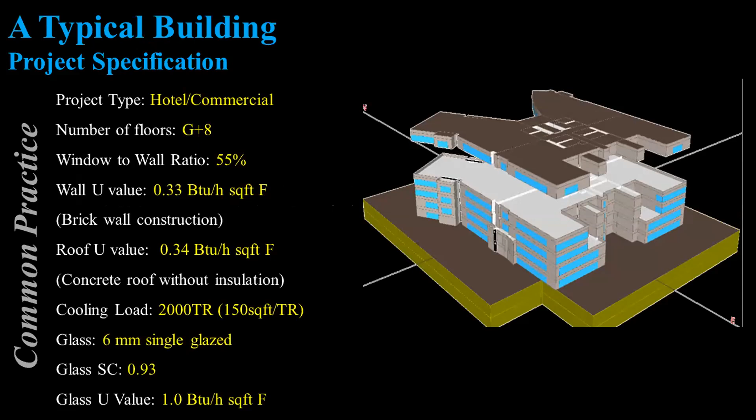When we analyzed this building, we realized that nearly 50% of the heat gain was being contributed by the envelope itself. It had a good window wall ratio. It had a good amount of glazing on the facade.

25% of the loads came from the internal, and 25 came from the ventilation, the fresh air load. Out of the envelope load which was there, 90% of it came from the four sides because a high amount of glazing was being used. 10% came from the roof.

And when we looked further in terms of the four walls or the four sides or the facade, we found that 90% of the heat gain was from the glazing and 10% was happening from the walls itself. So the glazing did play an important role in the overall context of the facade of the building.

Those were the days when we used to play with the building using the simulation tools. The simulation tools had just come out, and I also decided to play with the same building and see how relevant the whole thing is even today. I took that building and simulated it in all the four major climatic zones of India, which are composite, hot and dry, warm and humid, and moderate. And interestingly, the internal load remained constant because there is no change in the internal load.

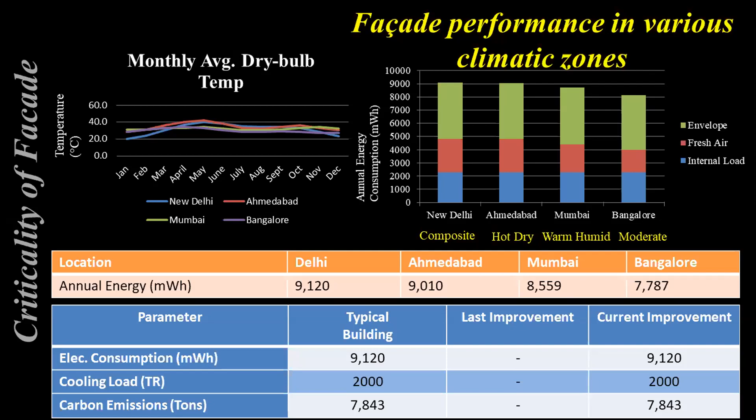What did vary was the fresh air load. That means the amount of fresh air which was being injected. Obviously, in case of composite climate, it has a higher impact as compared to the other climates. And the envelope load also varied in this context, as long as the envelope was not optimized. I'll speak more on this further.

Then I decided to further play with the whole thing and said, let's optimize and see how far we can drive this building. This was an imaginary building, so I could rotate it around. I could do anything with that. So we started rotating the building every 45 degrees. And you can see here the energy consumption dropped, and at a particular orientation, the north-south orientation, which is what Mr. Suresh Saab also spoke about, the building had the least energy consumption. So I picked it up.

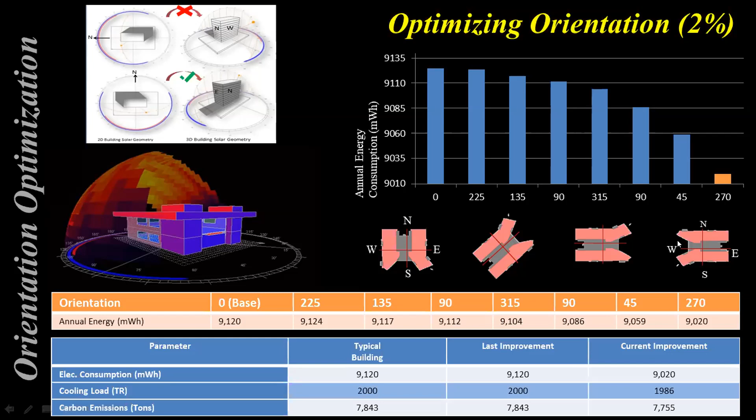To the same building, we started looking at the window wall ratio. The building that I had started with had a window wall ratio of 55%, which means 55% of the facade was glazing. It wasn't 100%, it wasn't that bad. It was a good building to have 55% area as the glazing. Started playing with it, bringing it down to 20%. And at 20%, it did yield a good result in terms of giving us the lowest energy consumption out of the optimized lot.

One would argue that at 20%, your daylighting might get affected, but there are many such good examples you would find around. In my own buildings that we have designed, we have found that 20 to 25% of the glazing area, if it is done rightly, is able to 100% daylight the building. And this finding was there in this building also, where 22% glazing area gave us a 100% daylit building. And these are some of the examples of green buildings which have come up in India, where they use the window wall ratio in a very beautiful manner.

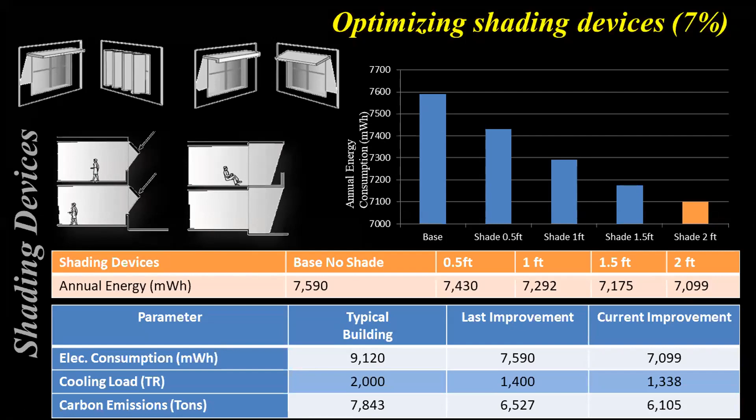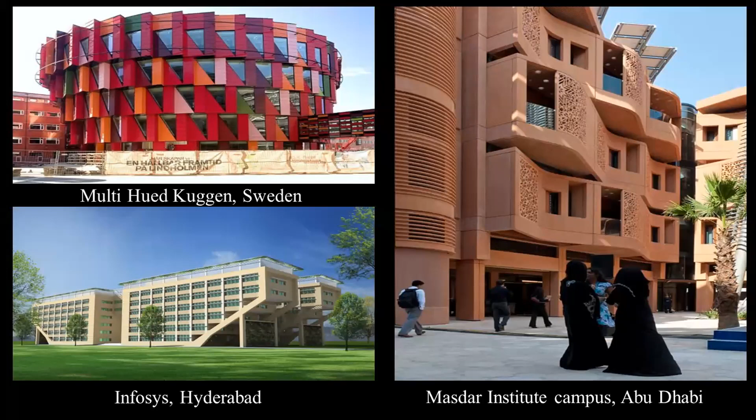Then we started looking at the shading devices. Since this was an imaginary building, I could play with it. We started doing the shading devices, which is the chhajjas, and extended the chhajjas from 0 to half a foot, 1 foot, 1.5 feet, 2 feet. And obviously the bigger chhajja gave us a good saving, as the direct sun could not come inside, and we could have better shading on the glass itself. We took that further and looked at some examples worldwide where shadings have been deployed beautifully and aesthetically appealingly by architects.

We started looking at the glass selection. Obviously, there are good glazings available today. And if you look at the number of companies, the variety of glazings, there are excellent selections available out there. In fact, the other day I came across a beautiful glass from a company which was practically clear. It was an architect's delight. And simultaneously it was also giving good protection, a good U value, and the shading coefficient was also decent enough. So these are the kind of glazings which are available. We selected a good glazing and applied it here.

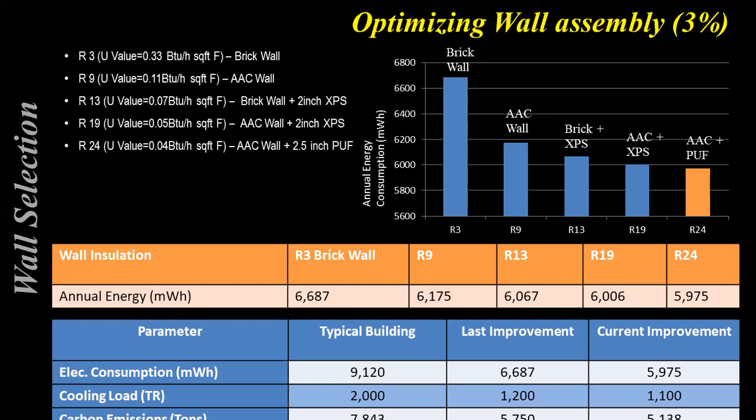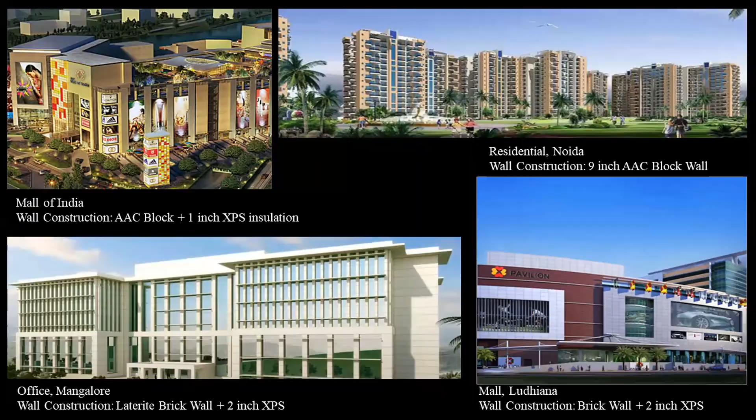Then finally, we looked at the wall assembly. In those days, we had still not started thinking about insulated walls. But today, if you look at the ECBC, the requirement of insulation in the walls is very much out there. We used a wall with insulation, and you'd be surprised, even in commercial applications the same has been done. If you look at one of the largest malls in Delhi NCR, Mall of India, it has actually got extruded polystyrene insulation on the outside. So there are developers and projects where these insulation materials have been used, despite talks about them being expensive or cost being an issue.

Just these 5 steps of optimizing the building envelope brought the air conditioning load down from 2,000 tons to half, about 1,000 tons. The energy consumption came down by nearly 35%, with an equivalent saving in carbon emissions also. That was very interesting at that time, because this was my start of understanding facades and interacting with facade designers and architects on designing high performance buildings.

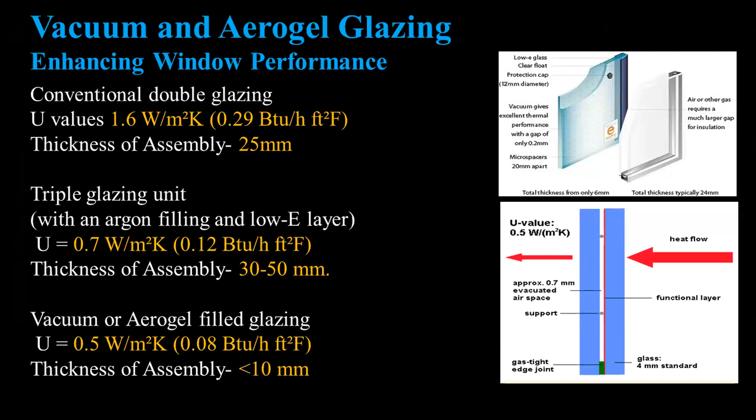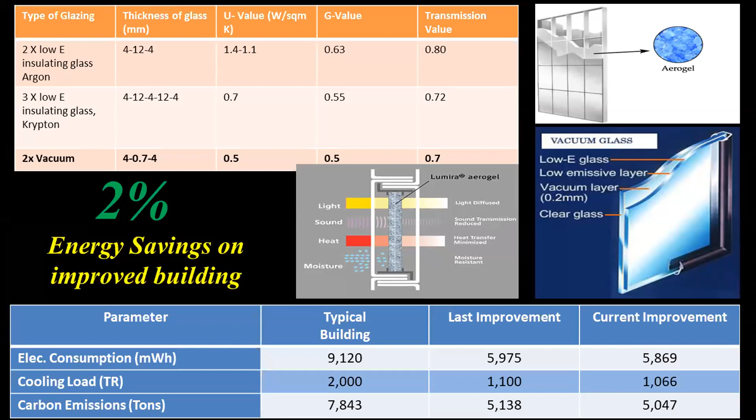We took this building again and looked at how we could further optimize it. I Googled at that point and came across the world's best glazing. When we applied this world's best glazing to this optimized building, which already had right window-wall ratios, right shading devices, right insulation, and right glass, we got only 2% more savings on energy. This proved that it's not important to put the most expensive glass, but important to put the right kind of glass in the right way.

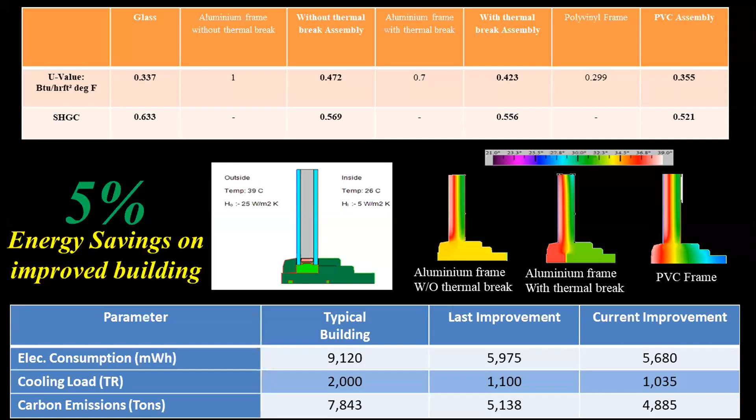We started looking at more ways to save energy. We looked at the thermal break in window frames, which ensures there is no climatic contact between outside and inside. Thermal breaks are excellent, but even till date we don't use them on most of our projects because of cost issues. Incidentally, the thermal break did yield nearly 5% savings in energy for this building, and it does make sense to look at the savings coming from the thermal break.

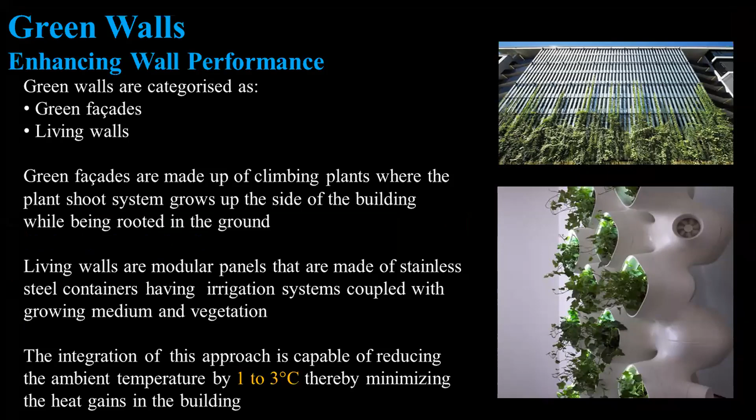We started looking at more innovative solutions. We said, why don't we look at putting a green wall? Because that green wall can actually shade the facade and help us. That incidentally gave us another 3% saving on the energy front. These are some examples worldwide where green walls have been very successfully used on building facades.

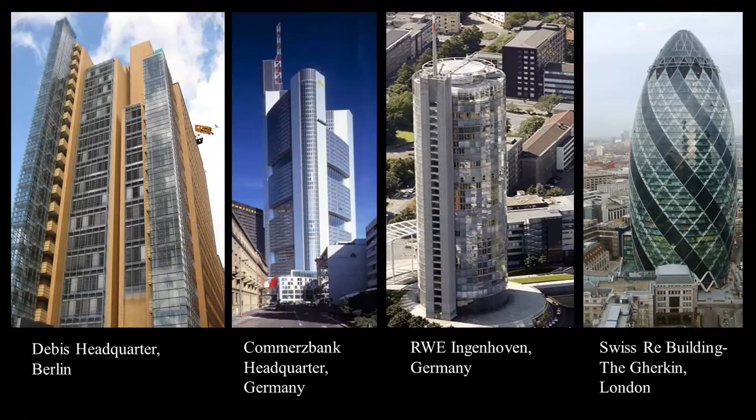We looked at double facades, where there are two layers of glazing with a gap in between, acting as an insulation layer. In colder climates it acts as a heat trap, and in warmer climates it is ventilated, reducing heat transmitted from the outer side to the inner side. So double facades, the ventilated facades, gave us a saving of 5%. These are some examples worldwide where double glazing and ventilated facades have been tried out. I haven't seen many examples of it in India, but it's something that exists.

The important thing was that for the most optimized building, after doing those basic 5 steps I spoke about initially, applying things like the world's best glazing, a ventilated facade, green walls, or thermal break could give us only limited savings, and the fundamentals of the design were the key.

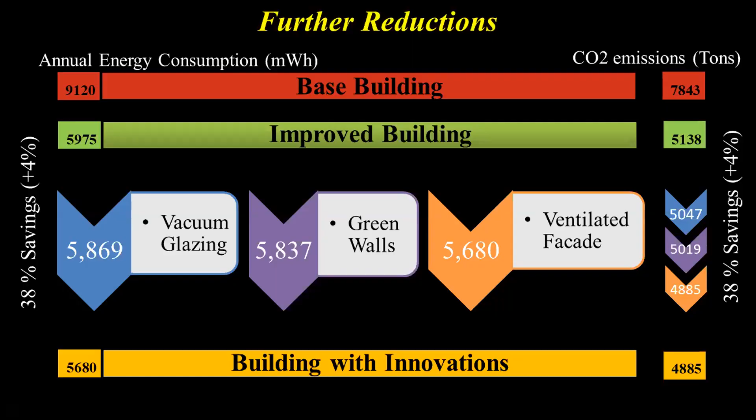Now this is what we worked on and talked about 10 years back. Since then, the world has moved a lot, and the country has moved a lot. Dr. Suresh Saab spoke about the National Building Code, Part 11, which is on sustainability, where we have covered the passive design aspect and facades in big detail. There's also the ECBC and the ECBC-R, where R is for residential buildings. Both of them again have a big focus on the building envelope and the role it plays in terms of energy. So far, all the discussions have been around energy itself, because that's been the driving issue till date.

We had a great green building movement. Suresh Saab mentioned about 7.5 billion square feet of green footprint that we have. And this green building movement, even though I've been part of it for 2 decades, I felt it missed the important connect, which is the common man.

Green buildings, till date, connect very well with the designers, the architects, the owner, maybe with the people associated in construction with it. But when it comes to the people inside, their appreciation of green stops because they are not directly gaining out of it, or they don't see any gain out of it.

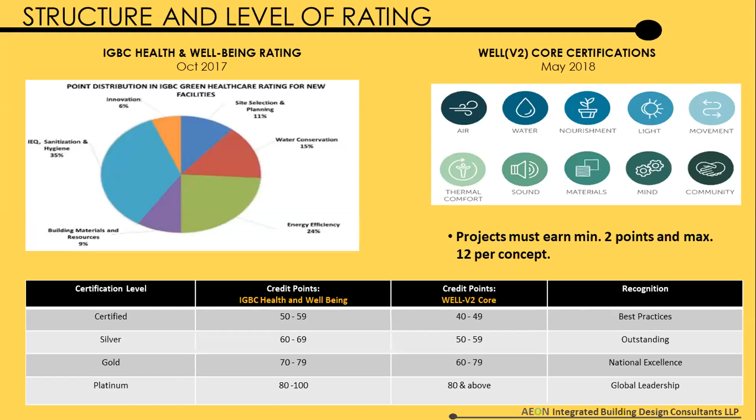That's why the newer rating system now out in the market, the WELL or the Health and Wellbeing Rating System, which IGBC came out with in 2017, and similarly the US Green Building Council promoting the WELL certification. If you look at both, their focus is all about people, and it directly impacts people who are working, living, or staying inside the building. Their certification levels are exactly similar to green buildings in terms of silver, certified, gold, and platinum.

But their focus is on the wellness of people. If you look at the IGBC rating system, issues like indoor air quality, comfort - which includes visual comfort (facade), thermal comfort (facade), daylight comfort (facade), acoustic comfort (facade), and indoor air quality to some extent dependent on facade. A large number of those credits are related to the facade of the building.

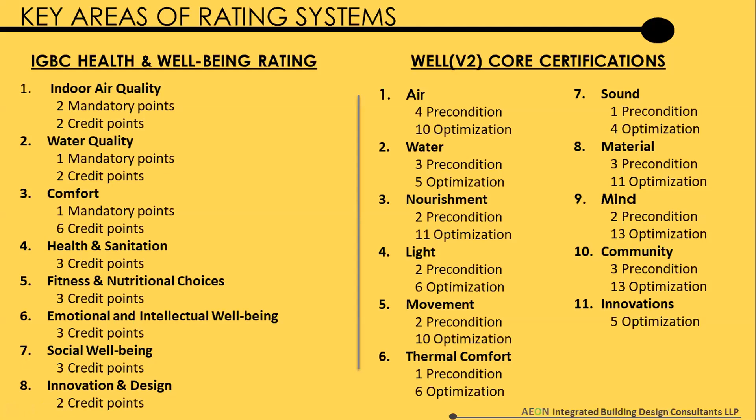If you go to the WELL certification, again air is facade, light is facade, thermal comfort is facade, sound is all facade. Some of it comes down to intellectual wellbeing, emotional wellbeing, all linked to the kind of environment we're providing to the people inside. So the shift is perceptible - shift is about the people, for the people, in what we like buildings to be.

I'm going to take you through some examples of buildings. Since I like to respect the time, even though Dominic has been kind enough to give me 45 minutes, since we started late, I'll try to go a little faster.

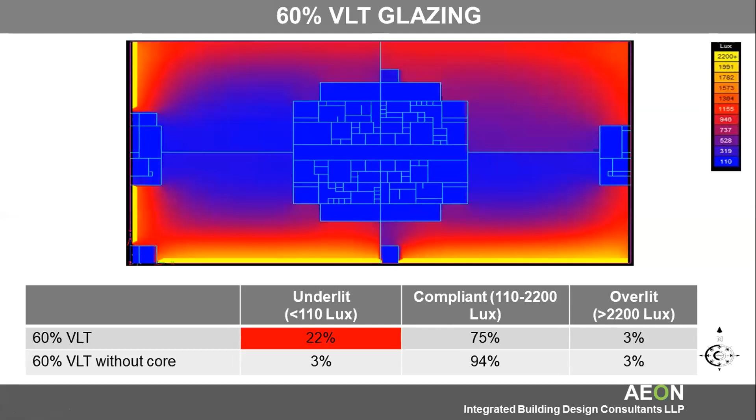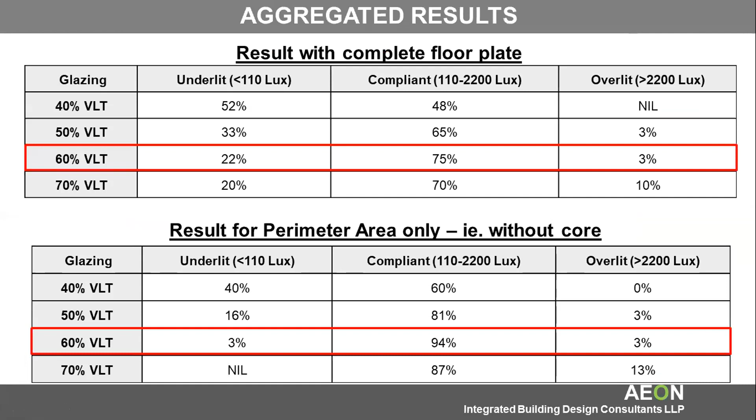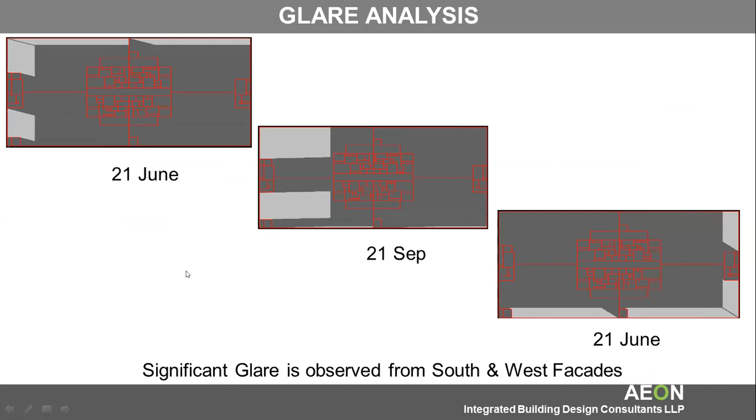But more important than daylighting is the glare it brings in. We could see that a 60% VLT glass could serve a good purpose for daylighting and for the wellness of the people. But look at the glare. If you see the videos running on the screen, you'll notice there is a good amount of gray patch indicating the extent to which light is penetrating inside on the floor.

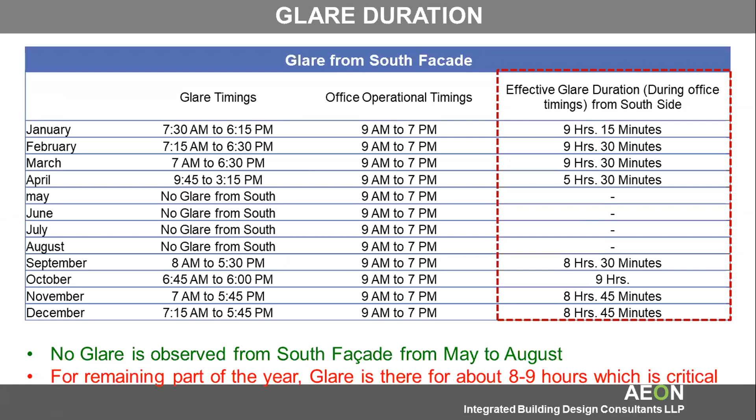On both the south and west side, there is deep penetration taking place. On the south side, practically the entire year, there are about 9 hours of the day where sunlight penetration onto the floor occurs. One could mitigate that using simple steps. Similarly, on the west side, penetration was nearly 5 hours every day throughout the year. Ultimately, this meant that along both the south and west side, one cannot even have seating there. If somebody is sitting there and we need to occupy the floor plate completely, those people will insist on the blinds being pulled down.

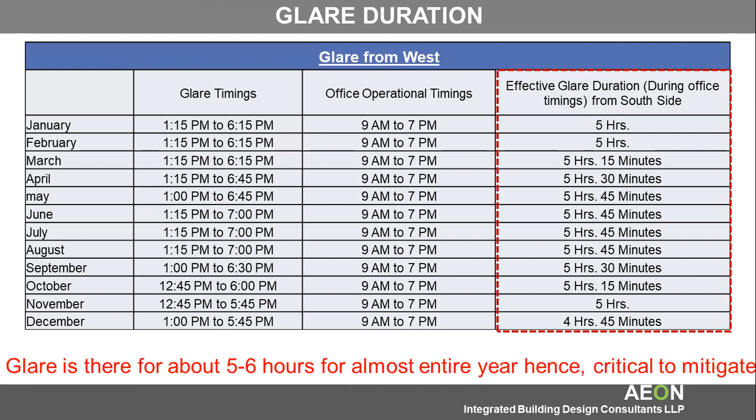The air conditioning engineer will never be able to satisfy them in terms of thermal comfort, and it's going to be total discomfort for those occupants. Once we did those corrections to the building, I'm not getting into how we correct a facade, because the intent of this presentation is how the health and well-being of the occupants is related to the facade, while looking simultaneously at the energy aspects.

When we corrected the facade design using shading devices and the right kind of glass, we could achieve 97% of the floor plate daylit with no glare. No glare, absolutely, you can see it on the floor plate.

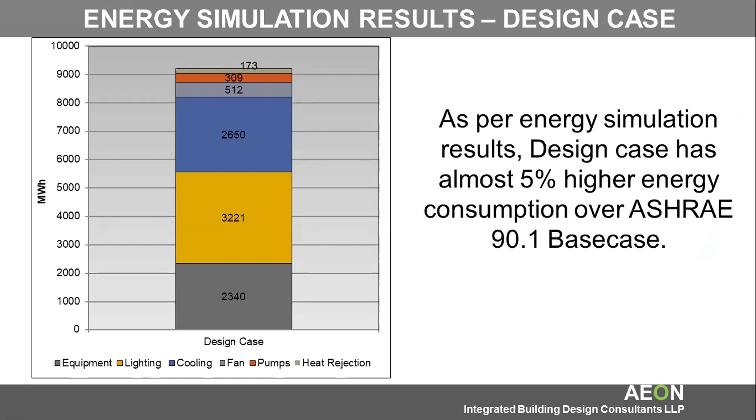On the energy side, for the same building, if we had stuck to the old building design, the earlier building would have consumed 5% more than the baseline of ASHRAE 90.1. Mind it, the green rating is given based on how efficient you are over the baseline, and in this case we were consuming more than the baseline. So it was in the reverse direction.

This building had an air conditioning load of nearly 1900 tons, consuming 5% more energy compared to what the ASHRAE base case was all about.

Look at what correcting the elements of the facade could do, making sure there's the right glass, the right insulation, the right shading, and the right window wall ratios. One could get the load down to 1100 tons just by the right kind of selection of the facade.

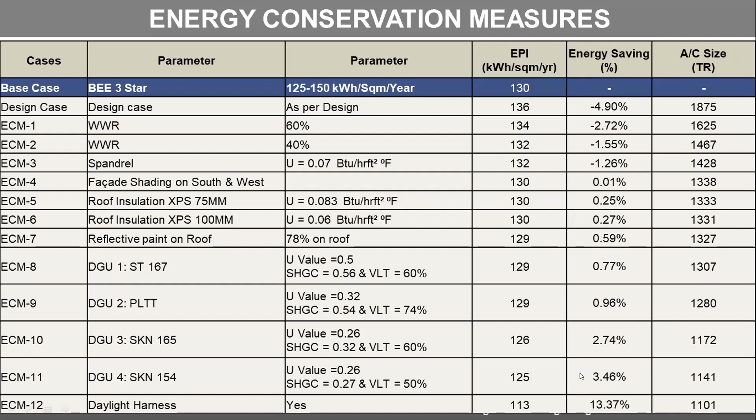800 tons of reduction, and look at the energy savings, nearly 18% energy is now being saved over the ASHRAE base case. Then we also looked at the electromechanical aspects, and we brought it down ultimately to 1000 tons, from 1900 tons down to 1000 tons, which was a big journey to travel in this case.

In another building, the brief from the tenant to the developer was that they wanted an envelope load of less than 1 watt per square foot, meaning the heat gain from the building envelope should not exceed 1 watt per square foot. To give context, in a conventional building it could be as high as 3 to 4 watts per square foot, so this comes down to 25% of what a conventional building might do.

Another brief said 80% of occupied areas should be daylit. Another line said zero glare in the indoor spaces. And another line said 100% of spaces should have outdoor views.

Now look at the brief which came from the tenant. It was a build-to-suit building for the developer, and the developer has to comply and demonstrate it. Now who's going to demonstrate that at the end of the day? It becomes the role of the architect, the HVAC engineer, and the energy engineer, all of them working together to achieve that.

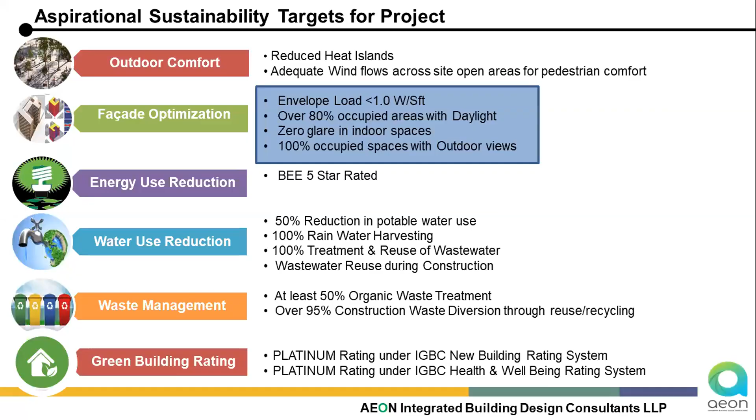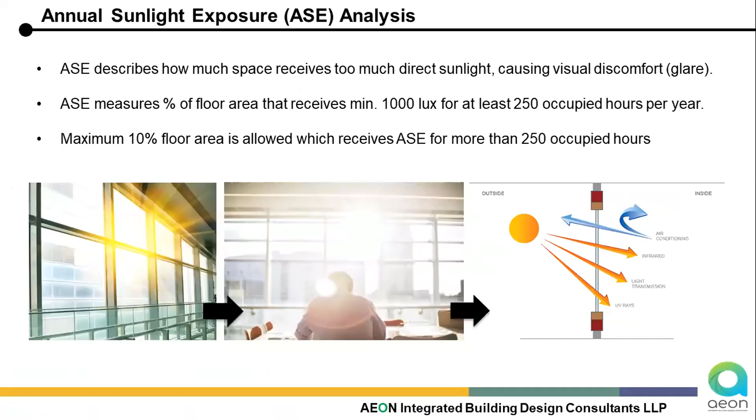Whereas in the first two buildings the glare was within control to some extent, the third building had all the west sun coming in with a very bright glare patch. Nobody could sit along the glass there.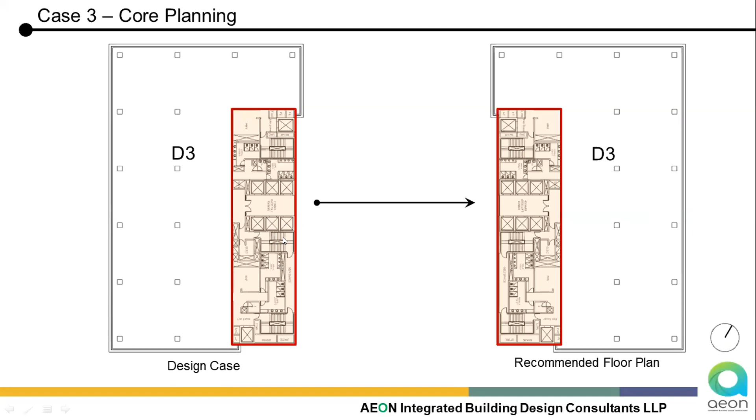The simple thing we could tell them was cheap and best: shift your core from the east side to the west side, block the west side using the core. That simple move could cut down the glare by more than 50%. It was a great suggestion.

Everybody from the engineering fraternity loved it, but from an architectural and aesthetic front it did not make sense, because this facade overlooked a beautiful green area, and the whole pleasure of looking out was being affected by it.

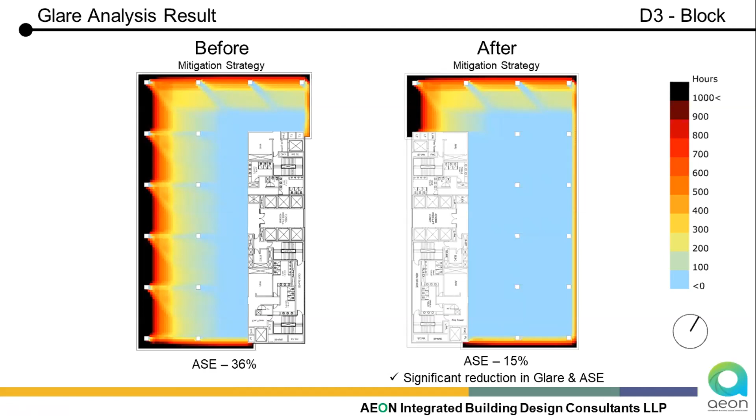So we came out with a different strategy. In fact, today there are more opportunities available to architects and facade designers to look at technology options. There's something called parametric design, where shading devices were put outside using this parametric system. There are about 2,000 iterations being done here on the screen.

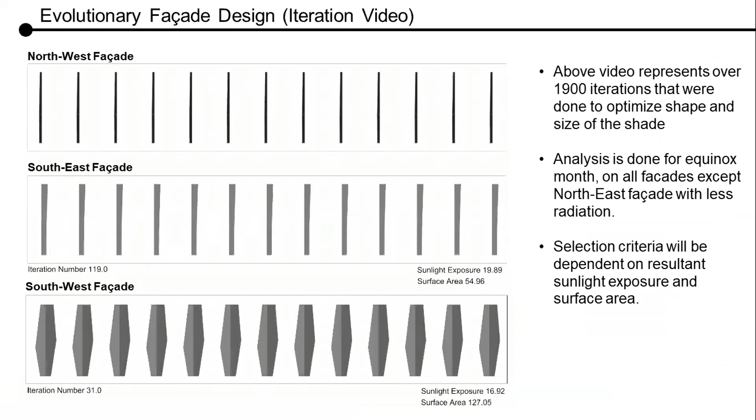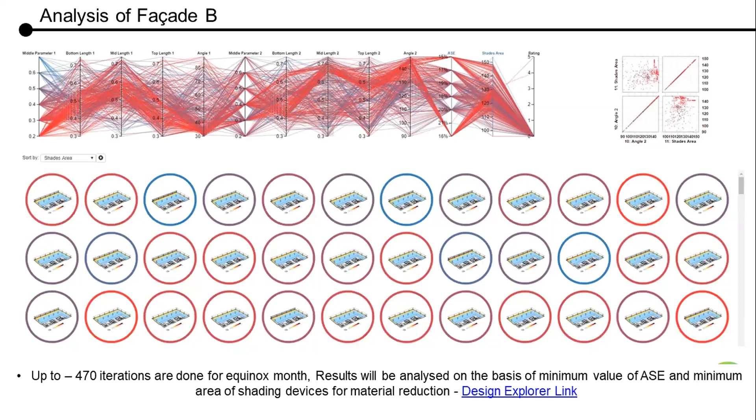You might see the video running of the shading device using this software, which gives you a very beautiful integration of the three main elements: energy, daylight, and glare. Once it was done, this is the kind of design which came out of the shading device. It was applied to the building, and you can see here, to a large extent, the glare was also cut down on the facade.

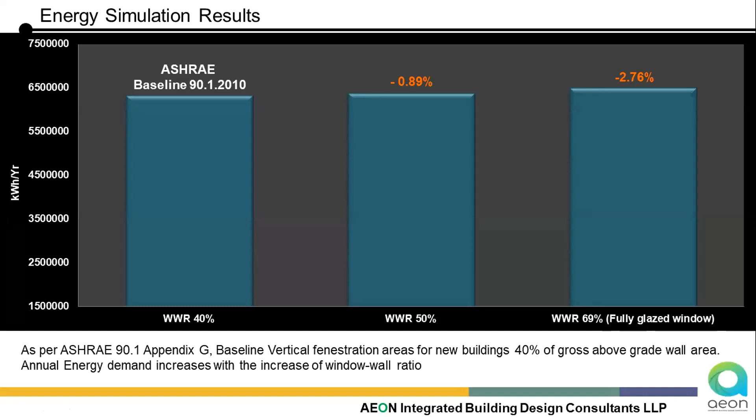We ultimately had about 83% daylit areas on the floor plate and glare being less. So moving further from here, I think this part is clear to us about the role which the facade plays on the energy.

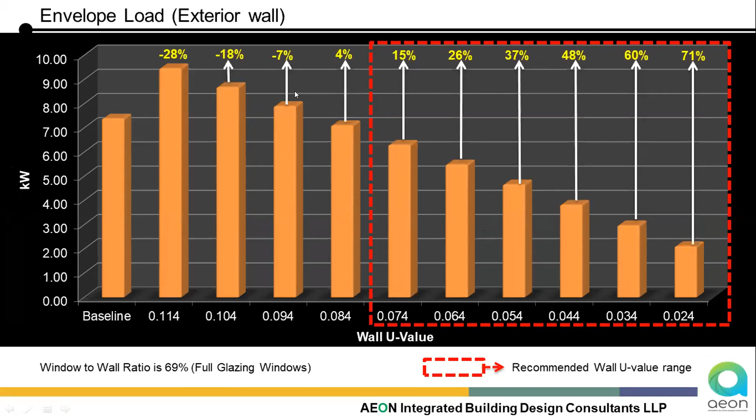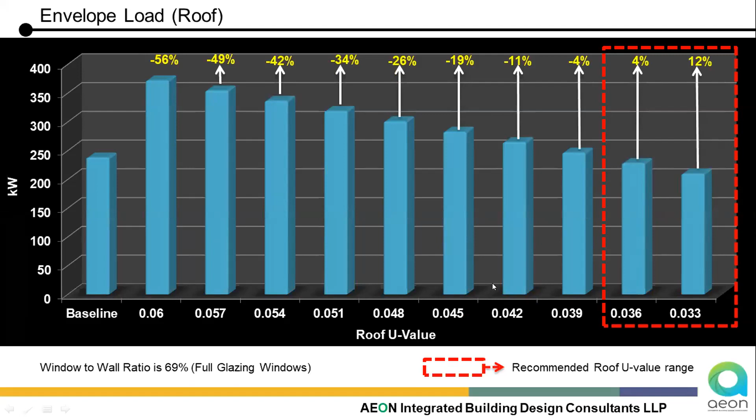And one could select the right kind of thermal conductivity. On this project, in fact, we could select what the wall U value should be. We played with the options of increasing insulation thickness on the wall, and how the energy consumption comes down with that. Similarly on the roof, increasing insulation thickness, and where is the best inflection point where you should be selecting your insulation thicknesses. Similarly for the U value of the glass, and the shading coefficient of the glass.

And then glazing options, there were 10 options of the facades that were drawn, out of which 3 could meet our requirement of bringing the heat gain from the envelope to less than 1 watt per square foot, which is what the requirement was.

Now, similar things have also been done for hospitals, where it's been proven - this is a project in Delhi - that in the case of healthcare, the relationship between daylight and patient healing has been linked. You can find articles after articles on this, on the website, and doctors talking about it.

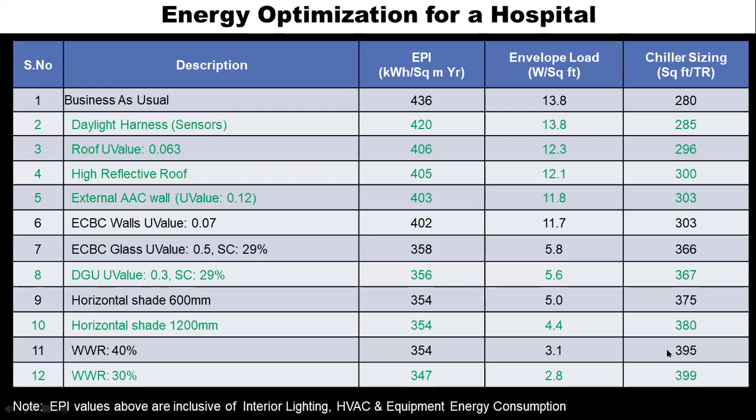Simple thing on this project: it had a good glazing ratio, good amount of glazing on the facade, but it was all on the north side. And look at it, just by doing the glazing design right, we started with 280 square feet per ton on the air conditioning front, and we ended with 400 square feet per ton just by getting the facade design right in this case.

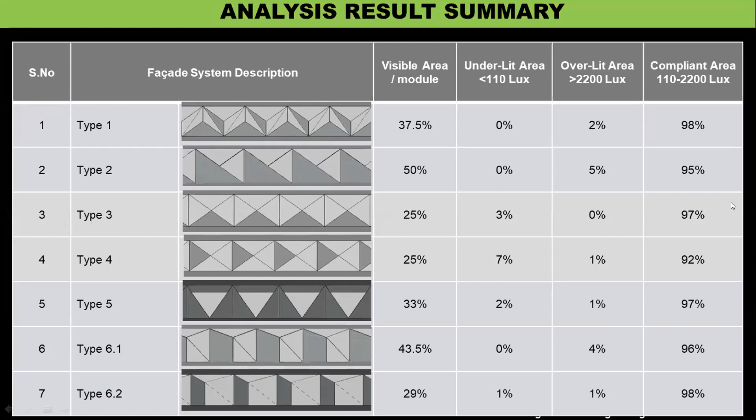Moving further, this is a hotel which we are working on in Delhi, and similar here we did examples of double facades which were tried out. We could achieve about 98% areas being daylit, and look at it again - starting with air conditioning load which was running at 230 square feet per ton, going to as high as about 530 square feet per ton - with facade playing the major role.

And again, the most important thing was giving comfort to the people inside, because whenever you go to a hotel, our first instinct is that we like to have a seat next to the glass, sit there, because we like to look outside while having our food or having the meeting. In case you got direct sun coming in, there's discomfort, and the whole purpose of the glazing can get lost.

And then going further, you can look at it now, how beautifully the architects have started trying out this integration of facade, shading devices, right kind of glazing, and the window wall ratios. This is a small project in Noida that we just finished. It's got a platinum rating, and there is a screen which has been put - actually, the whole thing is a screen around it.

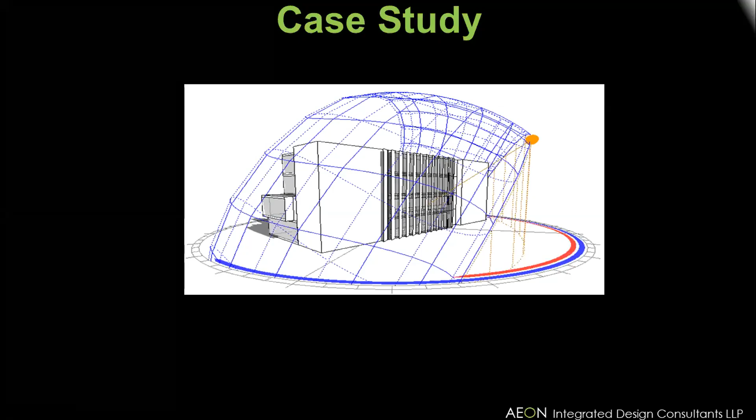Moving further, I think the important aspect is we are also going towards net zero energy buildings, where again the facades play an important role. This is a project that we are working on in the eastern part of the country, and the challenge in this one is the footprint of the building is very small. It's just an 800 square meter piece of land, and the building is going 45 meters tall. Now that's a tall building with very little area available on the roof for putting the solar panels.

The client brief is clear: they would like to have a net zero energy building, and they wanted to wrap the building around with the solar panels itself. Now that's easier said than done, because the moment you wrap the building with solar panels, there's a loss of view, there's a loss of daylight, and there's also the whole aesthetics issue which comes into the picture. So first we looked at the shadow which is being cast by the building on the ground.

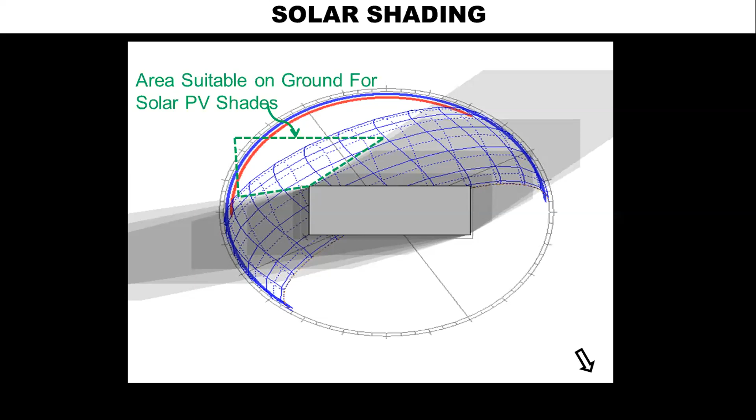And this is the green triangle area where there's no shadow cast whatsoever. So in this area, there was a car park which was put, and on top of the car park, there are actually solar panels. The intent is to get as much area for solar panels as possible.

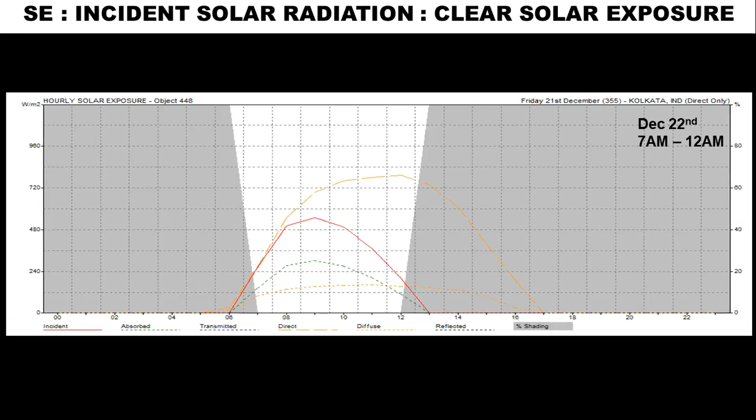This is solar exposure. These are good tools, software available for us to analyze the building facades more closely. And here one can see the hours in the day every month that the solar exposure is available to us. Once we know the solar exposure hours, once we know the intensity, we can find out what the generation is like. The next part was wrapping around the building with the solar panels.

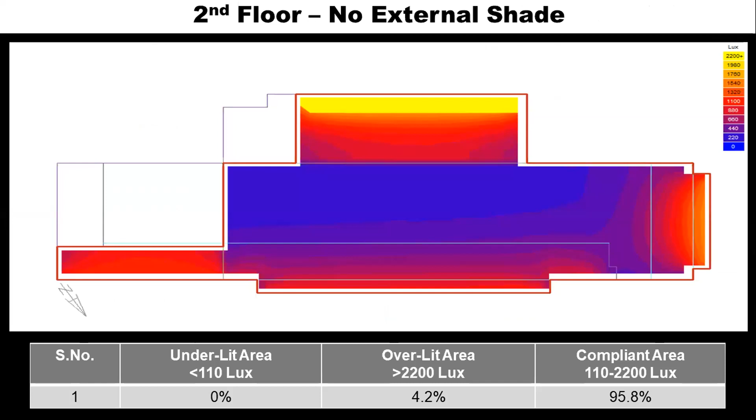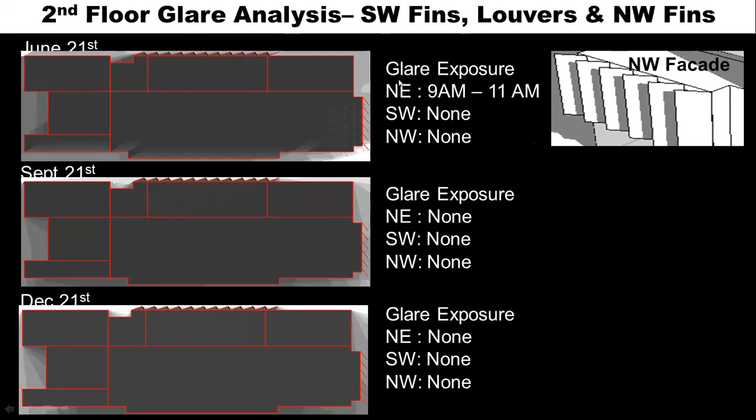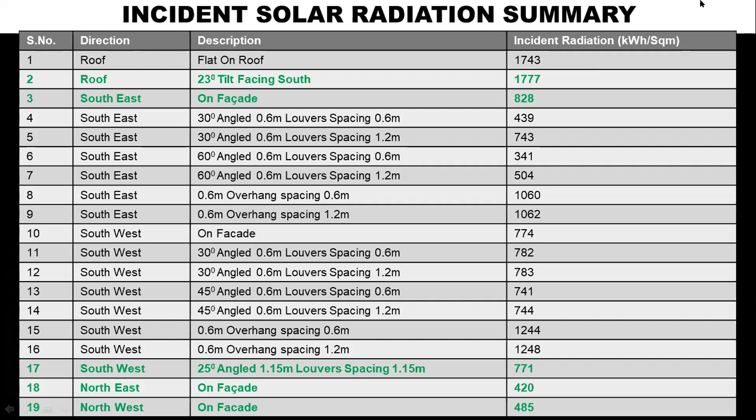Once it was all done, you can see it's 99% daylit, no compromise on the daylight, no glare, and these are the solar panels on the facades which have been installed there. There were a lot of iterations done to get that right. So that is high performance. You get a good performance out of solar panels. You are able to make it aesthetically appealing, no compromise on daylight, no compromise on glare, and multiple options were studied of the solar panel angles on the facade.

Finally, what came out is that the building could generate about 228 megawatt hours round the year, which amounted to about 67 units of electricity per square meter per year, which is the EPI, that we could generate from the solar panels wrapped around the building.

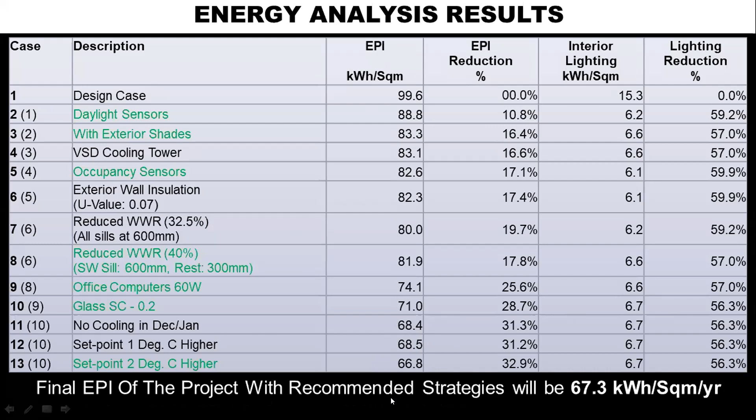The engineering was done in reverse, where the whole air conditioning systems, the electrical systems, the electromechanical was designed in a way that we do not exceed what we are able to generate from the building. And you can see here step by step, the consumption was brought down till the point the consumption and the generation matched to achieve what we call a net zero energy building performance. And you can see the examples of how the solar panels are wrapped around the building. And these are the inclined solar panels, which I mentioned earlier.

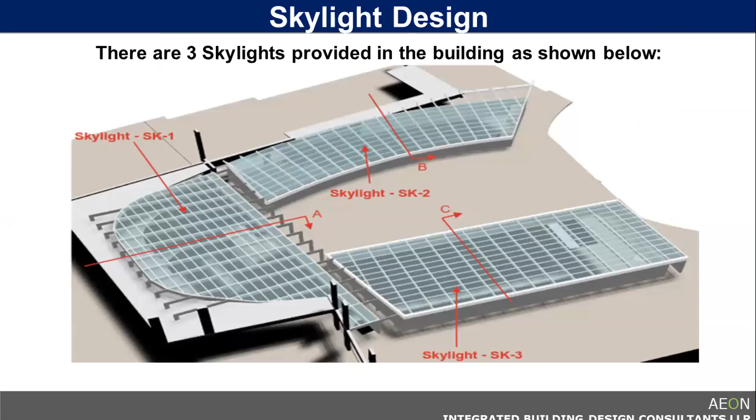The application of it goes on even in retail. What you see here is a retail project, where there's a big skylight provided on the roof, which is what we see in a lot of retail applications. But the architect and the client did not realize what that skylight was doing to the building.

You can see here the amount of sun that started coming inside the building, and that sun was not only bringing heat, but it was making the indoors uncomfortable for people to stand there, and it was also having an impact on the displays of the shops, because when brightly lit sun was falling directly on the display area, it was not allowing that effect to come out.

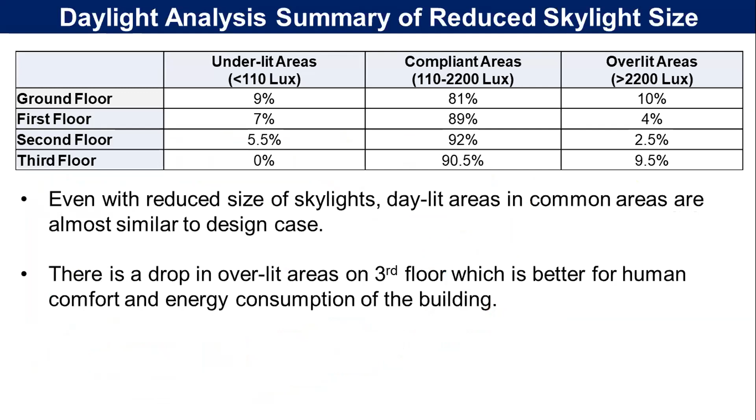So one improvement was trying out reducing the skylight sizes. That did not work. It did not really yield the thing. And there are lots of options. Again, as I said, the intent is not to get into a design aspect, but to show you the relationships which are there. There are three options which were tried out.

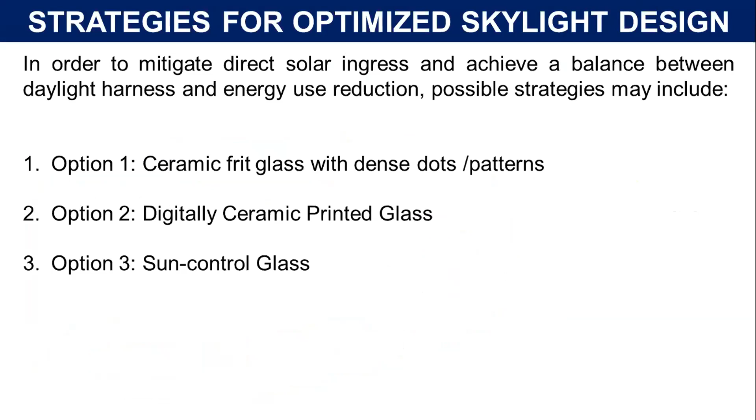One was the ceramic fritting, and this is the kind of fritting which was done on the skylight. And today these examples are also used for the facades. For our glazings also, we have been doing that. Digital printing, which is what this looks like, was tried out. All of the options worked very well.

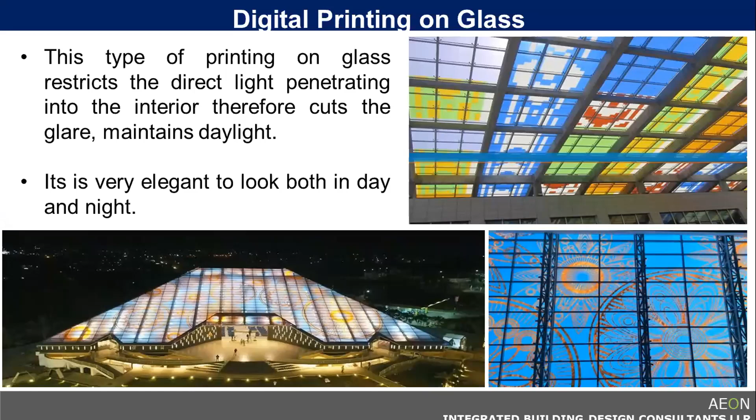And another one which the client was looking at was a sun controlled glass, where based on the intensity of the sun, the glass changed its color. And what you can see here, this is courtesy Saint Gobain.

I've got these pictures from them, and you can see here how, the moment there's a bright sun coming in, the glazing changes its color. It starts becoming darker, reducing the intensity of light and the heat gain which is taking place. So these were the things which were tried out, and it worked well. Now that's on one side of it.

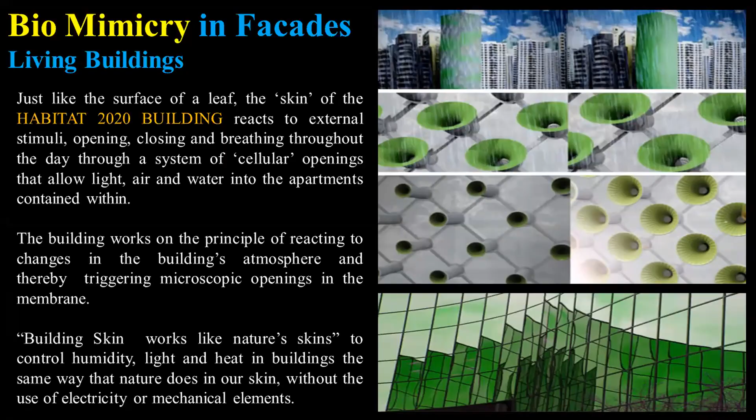I want to bring it out to another element altogether, biomimicry. And this is again a slide which I'd used 10 years back. I said that biomimicry is something which makes a lot of sense. And why can't you have a facade which opens up and closes depending on how your ambient is like? 10 years back, I felt I was ahead of time. We could talk about such a thing. There were these examples I found on the net at that point. There's a building in China where such a thing has been attempted.

And today we are working on a project like this, where exactly the same concept is being discussed about opening and closing of the facade. What you see here is a big hall, and on top of the hall, there are these 6 arches, a series of arches with the glass here in this area. This glass is bringing the daylight, and the intent of the client here is that the entire hall underneath it, they would like to have it naturally done. No mechanical air conditioning should be there at all.

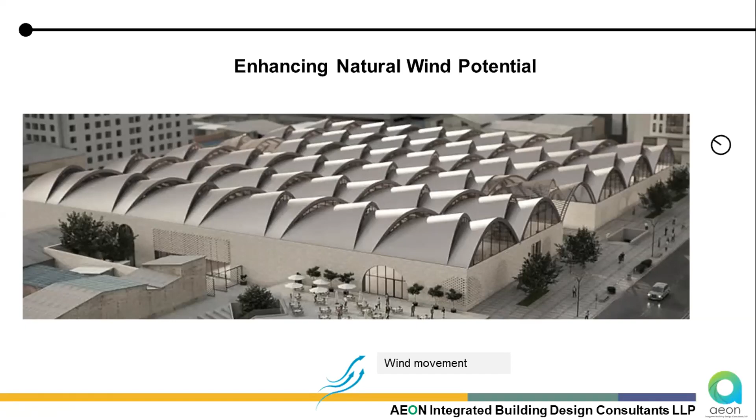And for that, it is important that the facade opens and closes depending on what kind of ambient temperatures and wind velocities are there outside. Now, this is a building which is coming in the colder part of the climate. And if you look at the psychrometric chart, most of the hours of the day are on the left side. My air conditioning fraternity friends would know. We are dealing with a colder climate situation here. And that's why we don't want any mechanical cooling or mechanical heating there. We'd like to have a system which is natural.

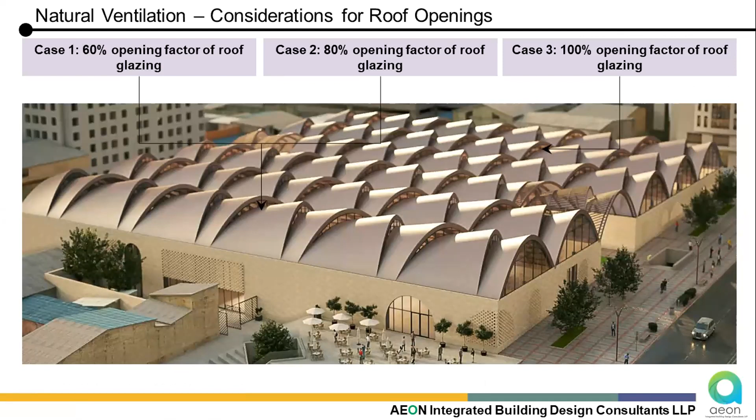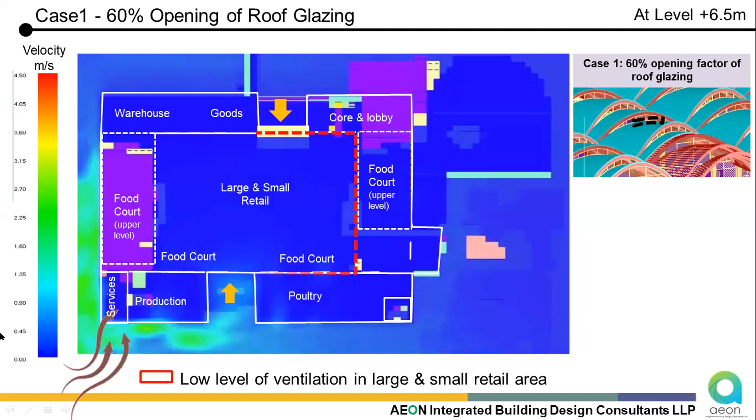And these are the wind movements which are being studied. We tried out a couple of options: if 60% of the glazing can be opened, 80% can be opened, or 100% can be opened, how will it work? CFD consultants were deployed, and this is a CFD model they came out with. Suppose I have a 60% opening of the top glazing, which is what I'm showing here. What is the kind of ingress of the wind which takes place inside? What happens with the 80%? What happens with the 100%? Those models were tried out.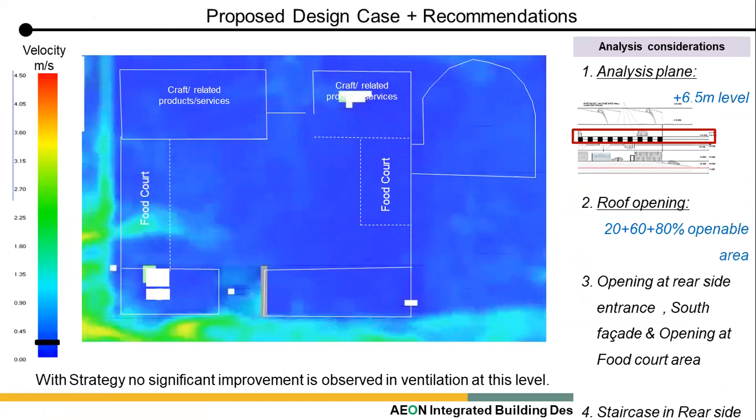And then strategically, again, I'm not getting into detail of it, the cross ventilation mechanism has been worked out there, getting the right amount of glazing opening, and it is all automated. So the glazing opens and closes based on the inside temperature, based on the wind velocities outside so that it's protected from high velocity winds, and look at the wind flows which are taking place inside the space itself.

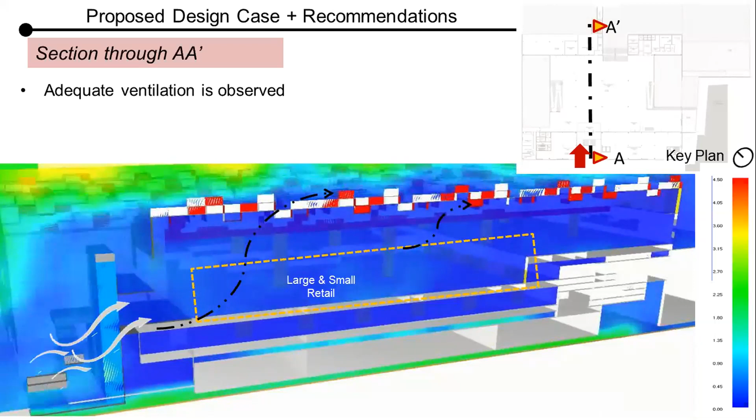And just to show you a final image, this is a cross section and how the wind is entering inside the space and flows through the area. And thereafter, these HVLS fans have been installed inside to enhance the air movement to get this kind of performance inside the closed space and make the whole place comfortable round the year, except for a few hours on the very hot side or the very cold side. 90% of the time, it will be able to work without requiring any air conditioning at all. So it was interesting to see that what I spoke years back is something we have the opportunity to work on now.

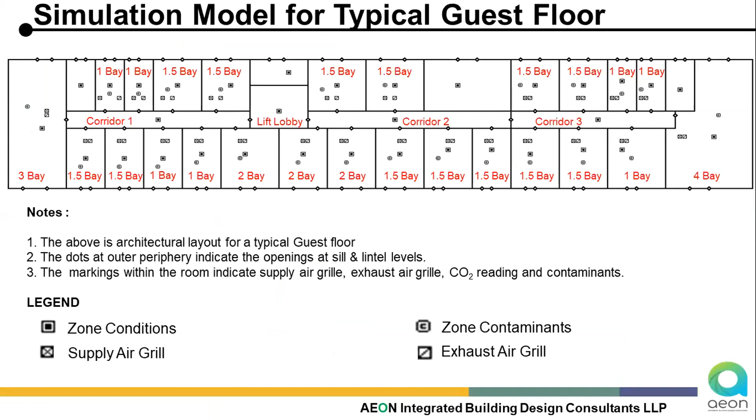The last thing that I want to talk about is indoor air quality and the impact which the facade has on that. This is a hotel that we are working on. In this hotel, the client's brief was they wanted to have the best indoor air quality. Very easy. One can go ahead and put the most expensive filters, and my job is done. It's as simple as that.

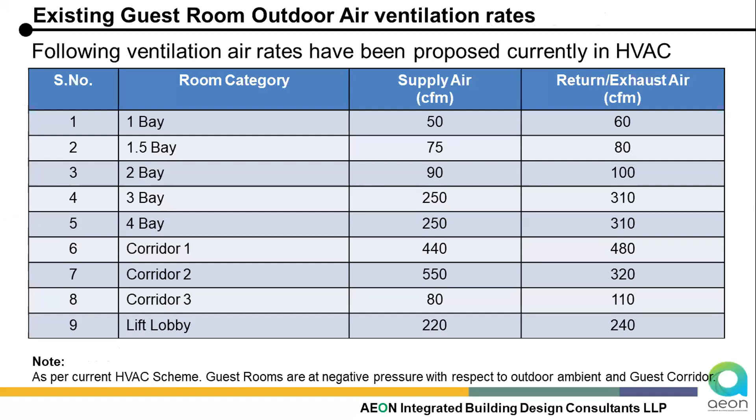But what we found out here was, again, the facade had a very important role to play. In this hotel, what was happening was, with the wind pressures outside, because the wind is blowing outside, and the facade always leaks.

There is no such thing as an airtight facade. And we are talking of PM 2.5 particles, because PM 2.5 is a very, very fine particle. It can move in through very small openings of the facade also. With the wind speed, the negative pressure that was there inside the room was not able to take care of it, and there was an ingress of the outdoor air pollutant which was taking place.

So what was done was that the pressure relationships inside were studied, a right amount of pressure by ensuring that we are supplying X air and taking back only about 0.7, 0.8 X air, leaving 20 to 30% air behind, so that the room is always under positive pressure and the outside air high pressures are not able to overcome, and we are able to get a good indoor air quality.

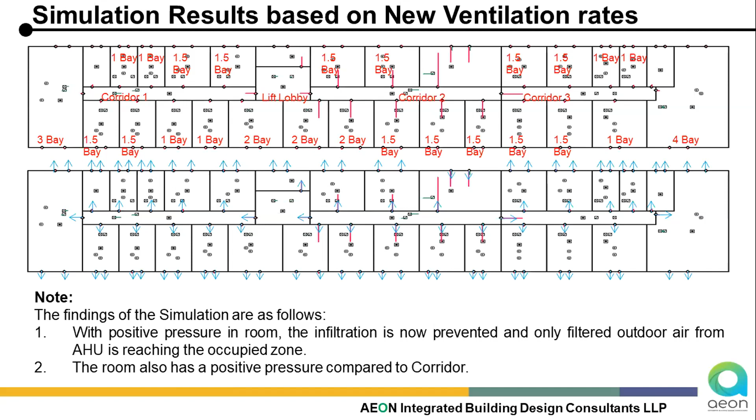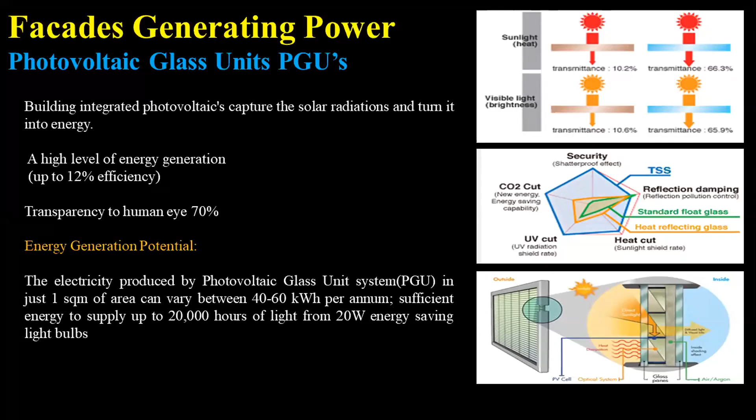Now, let me take you to the last part of my presentation, which is the future. Going forward, we see the facades becoming more and more interesting, more challenging. Aesthetics and the performance are going to get linked. These are the building integrated photovoltaics, which we've already started seeing coming in some of the buildings here. There are talks about wind energy also being harnessed and being made part of the building design, and we'll see that too.

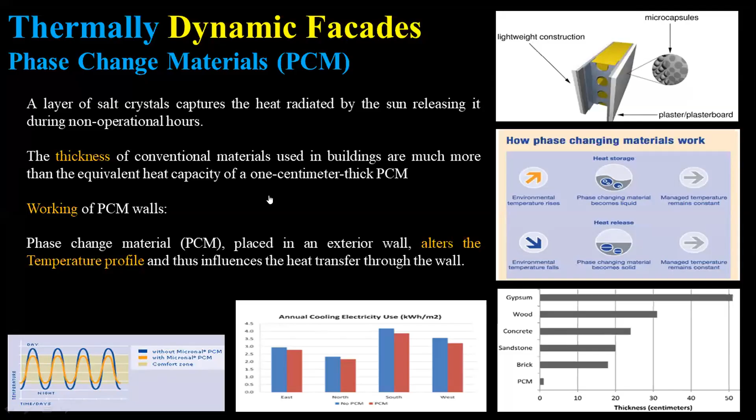There's also a very interesting building that I came across where they had used algae on the facade. It's the other way around: in the winter, the sun is very clear, the facade is clear. In the summertime, the algae starts growing and it starts shading the facade so that there's no direct sun going inside. And then the algae can be burned to generate energy also.

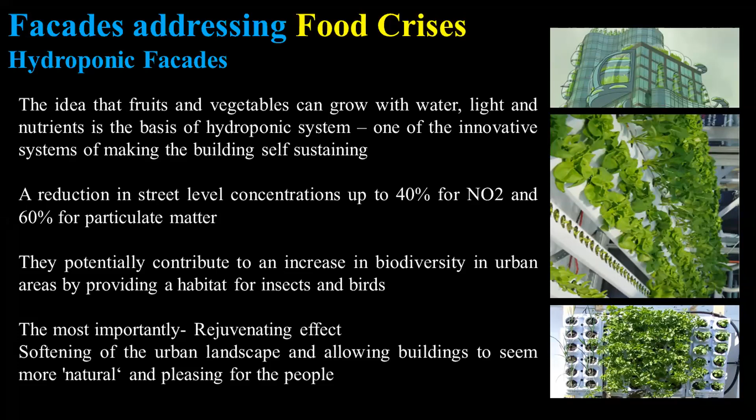There's also the science of hydroponics which is coming in, where the facades of the building are being looked at for addressing the food crisis and growing fruits and vegetables on the facade itself. So these are some of the exciting things which we are going to see in the near future. I just want to end the presentation by showing you an example of my own office and what we have gained out of being part of a healthy environment and a green environment.

This is my own office where I'm sitting right now and talking to you. Incidentally, for the last 1.5 hours, there's no electricity. We do have a generator, but I'm not running it because I'm the only one sitting in the office. It's pretty comfortable inside because there is no direct sun. Maybe it's about 27, 28 degrees here, and I just got a ceiling fan which is running.

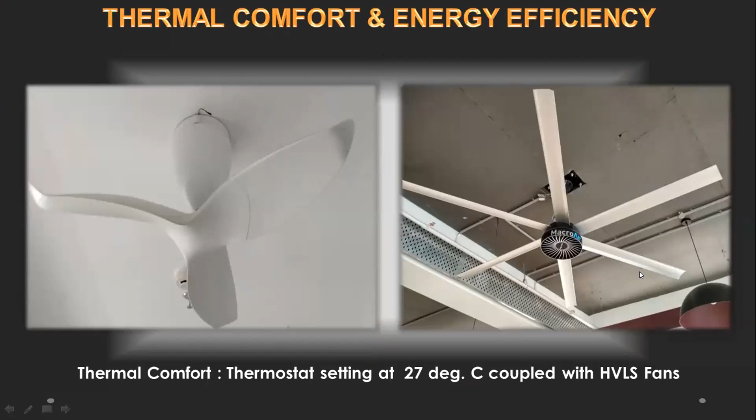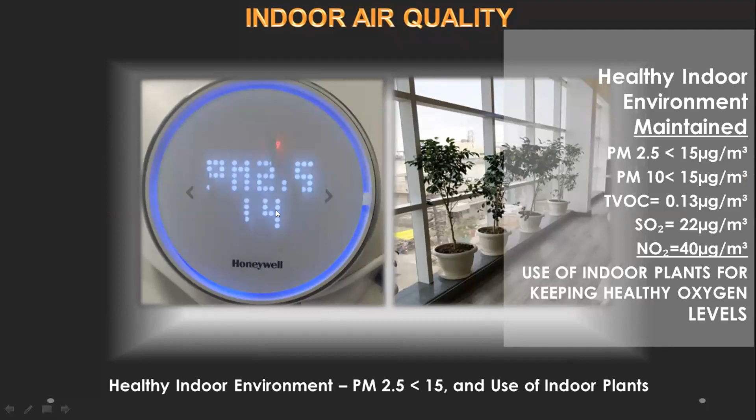We got an air purification unit. We got a fresh air unit. We are dumping the fresh air inside. And that's the PM 2.5 levels which are maintained inside the building at 14, whereas the Delhi ambient PM 2.5 levels are 500. All 5-star air conditioners. And this is the image of the office.

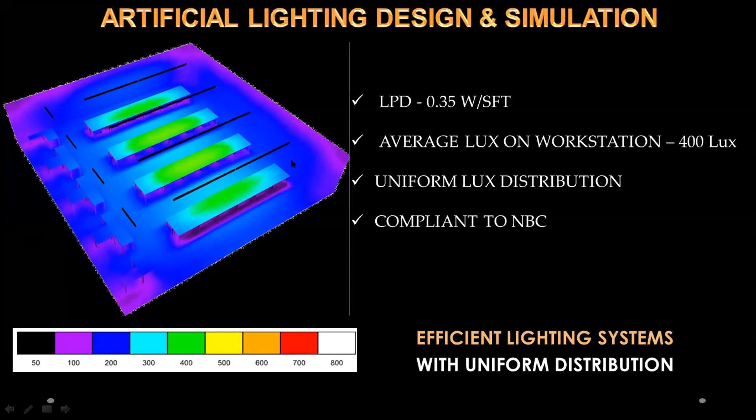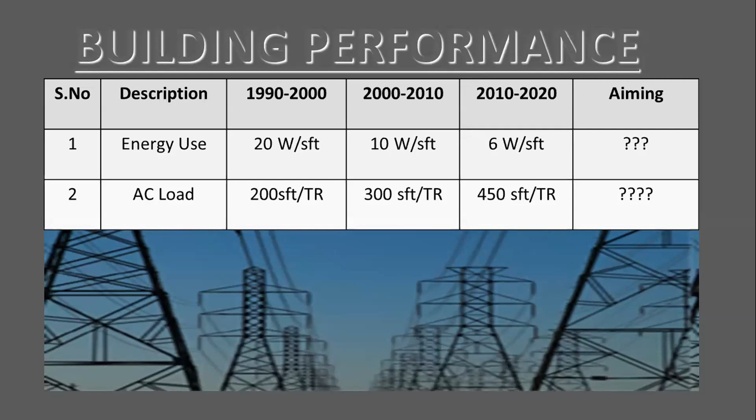So that's the end of my presentation, and I feel that if we have to keep driving down the performance of the buildings in terms of energy consumption, in terms of minimizing the air conditioning systems, we have to move towards facades, look at the facades more intently, and the relationship they play with respect to human wellness, energy, and the overall performance of the building is big. And that's why one of the fastest evolving elements today in building design is the facade.